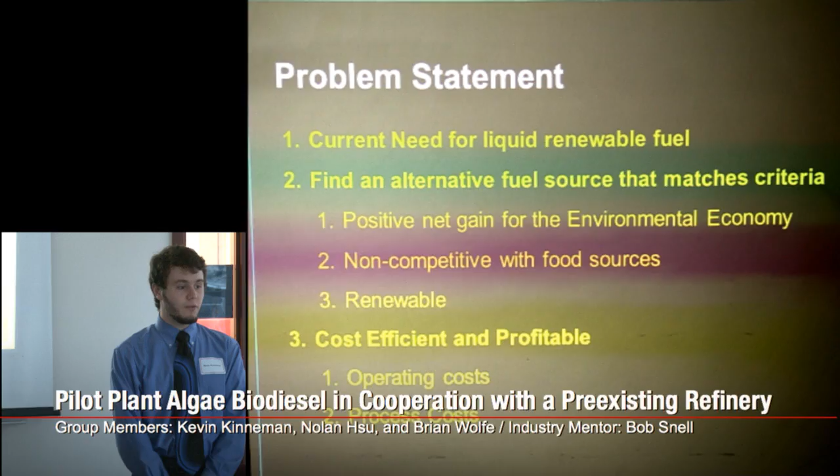We've noticed a couple problems in the industry these days, primarily that despite the rapid advancement of green fuels like solar panels and hydroelectric power, there is still a need for a transportable liquid fuel. Cars, jets, and boats still rely on this. It's difficult to put a solar panel in a car.

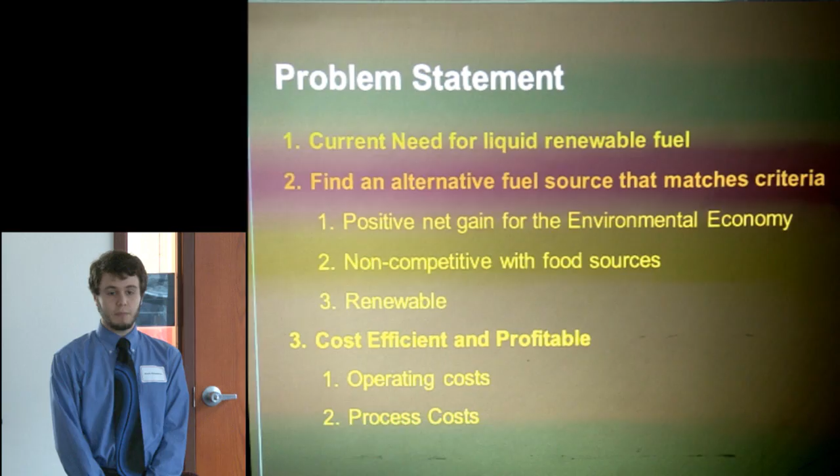So we're hoping to find an advanced form of biofuel which can act like diesel but doesn't have the issues of modern petroleum. It needs to have a positive impact on the environment, be renewable, not compete with foodstuffs, and if possible be as cheap and efficient as possible to produce, so there's a good profit margin to encourage development.

The current dilemma is that petroleum isn't the cleanest resource. Not only in its burn, but the production of petroleum is a CO2-positive process, releasing pollution to the environment. Additionally, there's currently not much else we can use for portable liquid fuel. There are limited options right now.

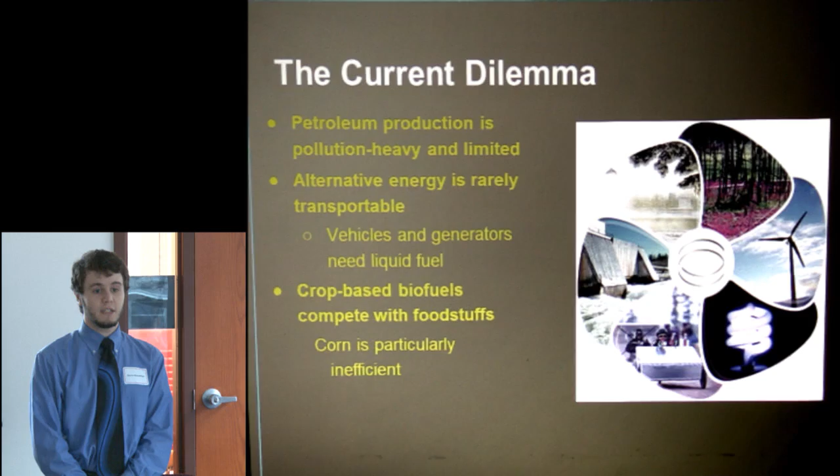However, biofuels from corn and sugarcane have come into the field, especially ethanols and gasolines. We're hoping we can find a method which doesn't compete with foodstuffs, because every crop dedicated to biofuel which isn't going into food is obviously causing trouble.

So our solution is algae, and we'll give you a quick overview of how it works. Our solution is to use an algae feedstock to produce a biofuel, specifically biodiesel in this case.

Algae is grown in a mix of phototrophic and heterotrophic processes, and in this it produces an oil. The oil can then be extracted from the algae cells, refined, and converted into biodiesel. This biodiesel can then be sent to a refinery, refined, and eventually sold to consumers.

The profit for a process like this can be improved by government subsidies, specifically renewable index numbers, which we will go into detail on later.

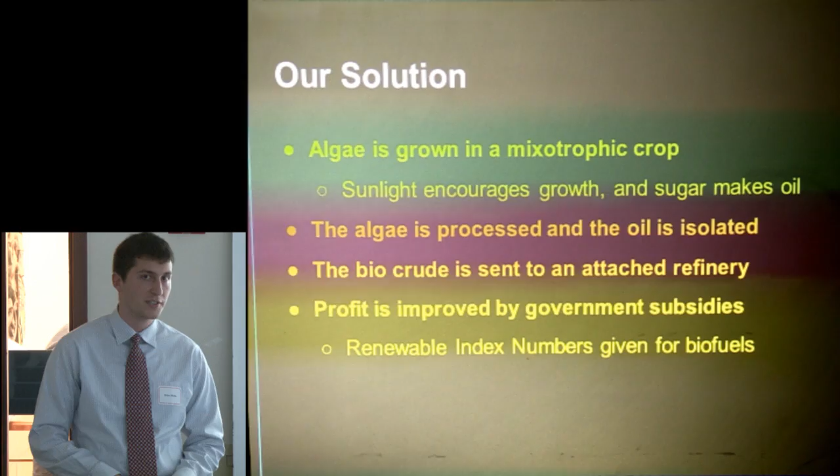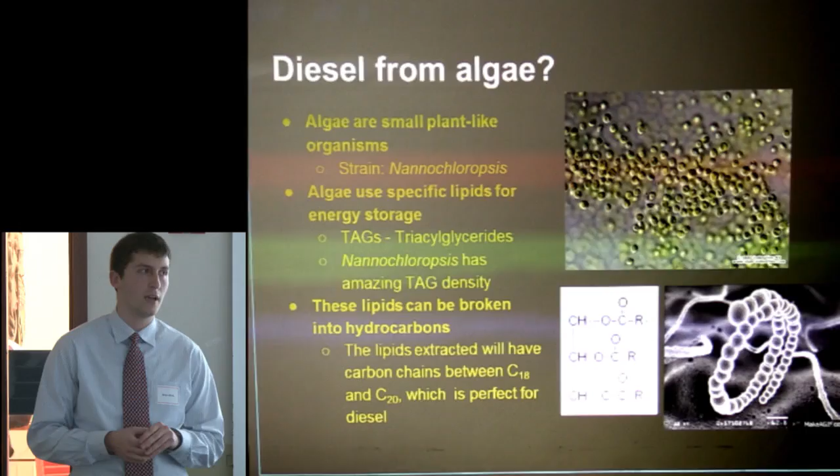So, how do we get diesel from algae? Again, algae are plants—basically small plant-like organisms which can produce an oil. For our specific species of algae, there are many kinds, obviously. We decided to go with Nannochloropsis as our specific strain.

The reason for this is a number of reasons. First, this strain of algae can be processed both heterotrophically and phototrophically, by a photosynthetic process or a metabolic process. In addition, this strain has a rather high lipid concentration per dry algae mass, which is ideal since the lipids are what gets converted into our final biodiesel product.

As far as the kind of lipids we're looking to get, algae store their energy in a form of lipid known as a TAG, or triacylglyceride. You can see a picture of what this molecule looks like.

Basically you have a glyceride molecule with 3 long-chain fatty acids attached to it. It's these long-chain fatty acids that comprise biodiesel, so when you convert it, you remove the glyceride molecule and you're left with your long-chain fatty acids.

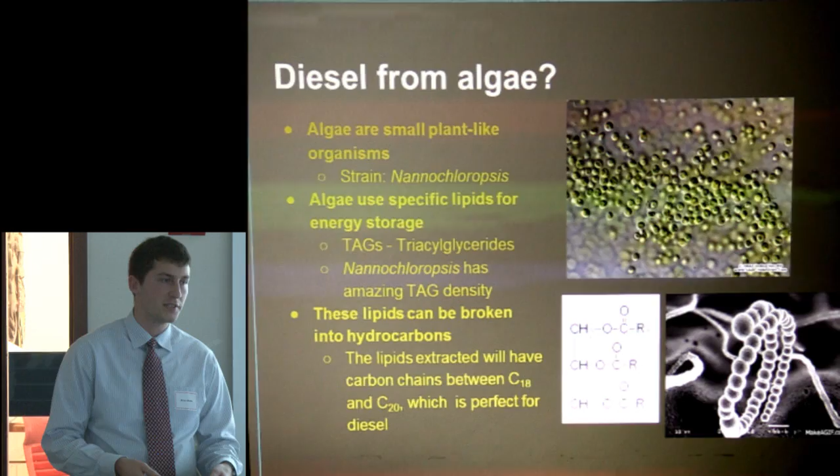The long-chain fatty acids are going to be between C18 and C20, because this is what matches a comparable cetane number for diesel fuel, and we want to mimic that.

This is a basic schematic of what our process looks like. There are 6 main process steps. We begin with algae growth in a phototrophic bioreactor, meaning it uses the photosynthesis reaction we all know from Bio 101: light, CO2, and water combined to grow the cell.

After this, we move on to a heterotrophic bioreactor, which uses a metabolic process—sugar and oxygen to grow the cells. The specific focus of this part is the lipid growth. After this, the algae must be dried. We have 2 processes for drying.

One is a bulk water removal by electroflocculation, and the next drying process is sort of a fine water removal using a continuous tray type dryer. The goal of this is to remove the water concentration down to less than 1%, and this is important because in the later extraction and conversion steps...

Having water in the system will lead to side reactions which we don't want, forming soaps and things like that. So after the algae is dried, we send it to an oil extraction step, which basically involves a hexane solvent to remove the oil. After that, the oil is sent to the final step, which is the conversion to biodiesel by a transesterification reaction, which is a common process used to convert any oil into biodiesel, including vegetable oils and things like that.

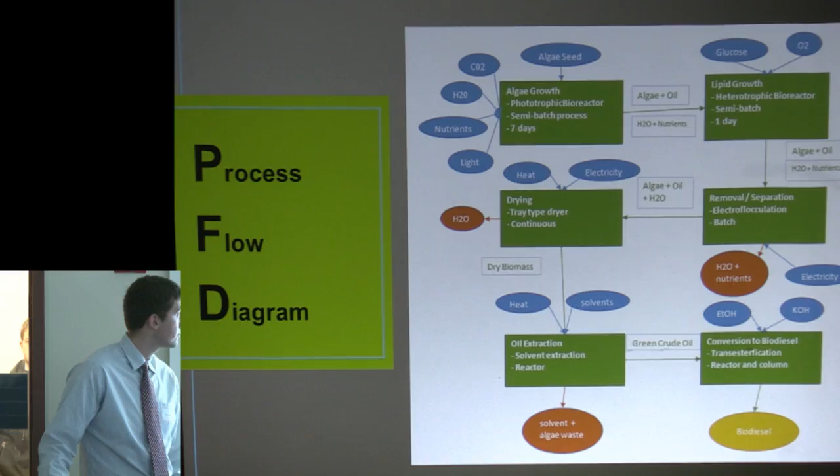So I'm here to talk to you about the business plan. The most important part: how are we going to make money?

Currently, algae-based technologies are inefficient. The heating process alone is extremely energy inefficient. Therefore, the cost to produce it does not outweigh the amount of money that can be made off of it. The way we're going to alleviate this is by combining with ExxonMobil at an oil refinery. With an oil refinery, we're provided with off-streams that they have, so heat, CO2, and water, as well as the expertise in land that Exxon can provide, while we're providing them with their own bio-renewable energy source, which cuts down their cost of production as well.

Our process currently produces 1,000 barrels per day. The reason we chose 1,000 barrels per day is that at 1 barrel per day, it's useless for the oil refinery. But at 1,000 barrels a day, we still maintain our pilot plant scale while giving a good amount of data to ExxonMobil. We hope to reduce costs by improving operational costs from ExxonMobil and then improve our sales of bio-renewable energy.

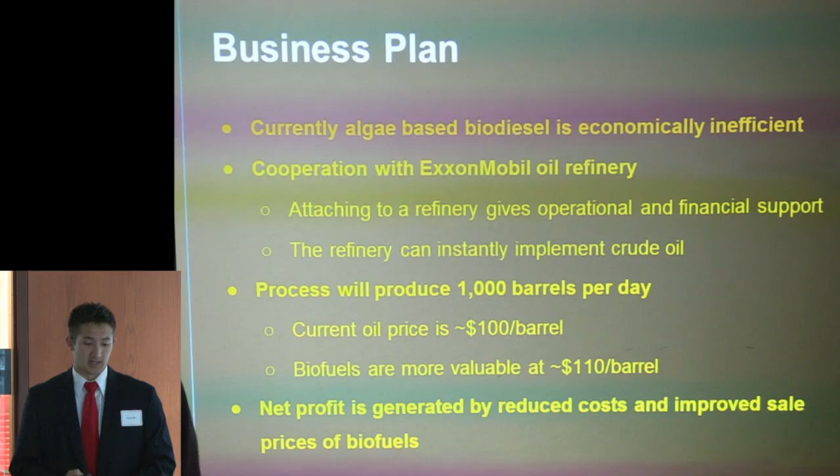So with that being said, welcome to Baytown, Texas. Baytown, Texas is where ExxonMobil Corporation's largest oil refinery is located. We've chosen Baytown, Texas for a couple of reasons. First of all, as we said, Exxon can provide that infrastructure and support that we need.

Secondly, Texas has a climate that stays the same throughout the year. We don't have to worry about any tornadoes or earthquakes too much, so we can easily create our equations to monitor all of our growth and our processes. In addition, the weather is consistent, so the sunlight for the algae will be consistent, and we'll be able to actually grow at a rate consistently throughout the year.

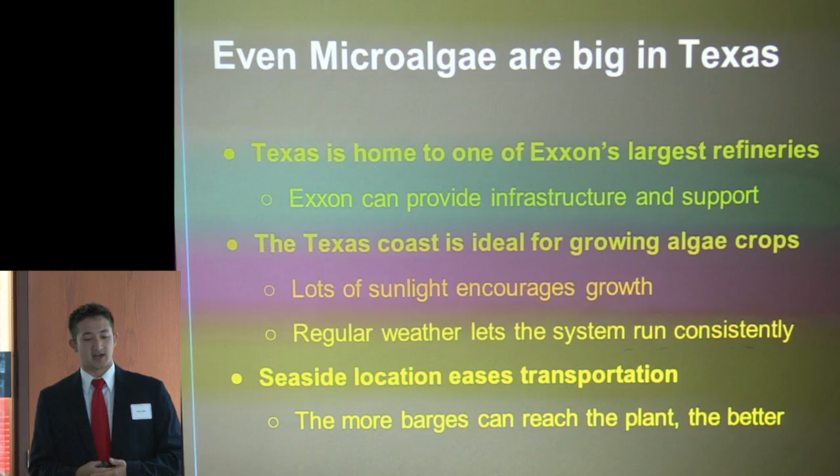In addition, if you look back here, we're on a port. That port will provide us transportation, which, as some of us know, is a large cost in the industry. If we're able to just take the transportation costs down, then once again, we remove operational costs.

So we'll go into a few specifics here for our business model. The actual growing process of algae requires three things: water, CO2, and nutrients. With the CO2 being one of the more expensive feed sources, it's imperative that we can use the oil refinery's CO2, as they have a ton coming off just from their process. This will cut down the operational costs of growth and give us a little more boost in production.

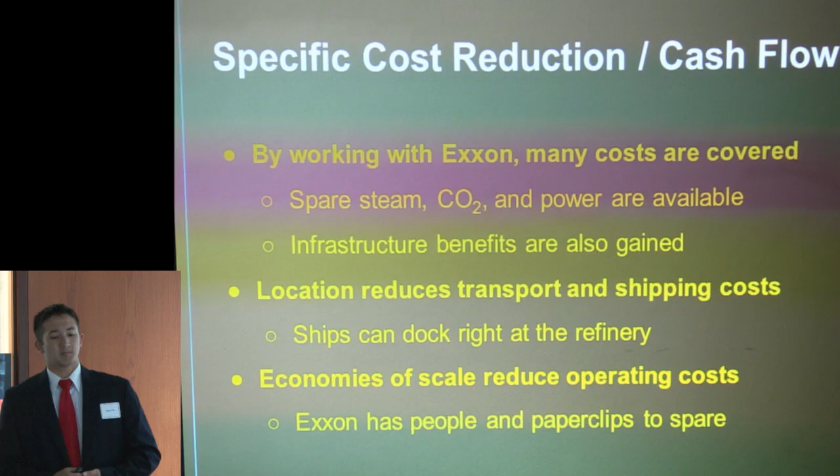In addition, the oil refinery produces a lot of heat, one of their off-streams, one of their byproducts. We can use that in our heating cycle to dry the algae, as Brian spoke about earlier, while not costing a fortune. And once again, we have the location of the ships and the docking, and Exxon has people, expertise, and experience to spare for us.

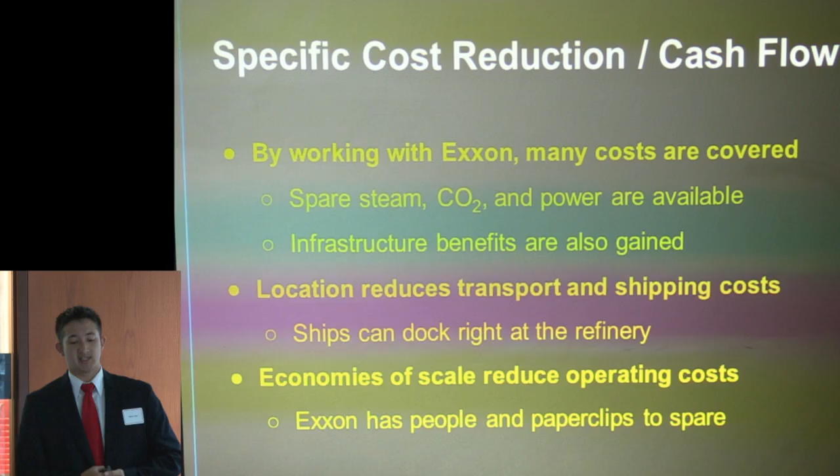At this point, we'll be starting with a quick technical summary of our process so you can understand the details of what goes on a little bit better.

Okay, so perhaps the largest portion of our process comes with the bioreactors. The point of the bioreactors is obviously to increase the cell count, grow the cells, but in addition to increase the lipid concentration, because it's the lipids that make up our product. The first phase of growth, of the two phases, is going to be the phototrophic algae growth, which is focused on the algae growth portion. How it works: it's a photosynthesis process, so light, CO2, water, and some other nutrients for the cells. The important thing here is that it's a carbon negative process, which is a rather important intrinsic benefit that we're looking for.

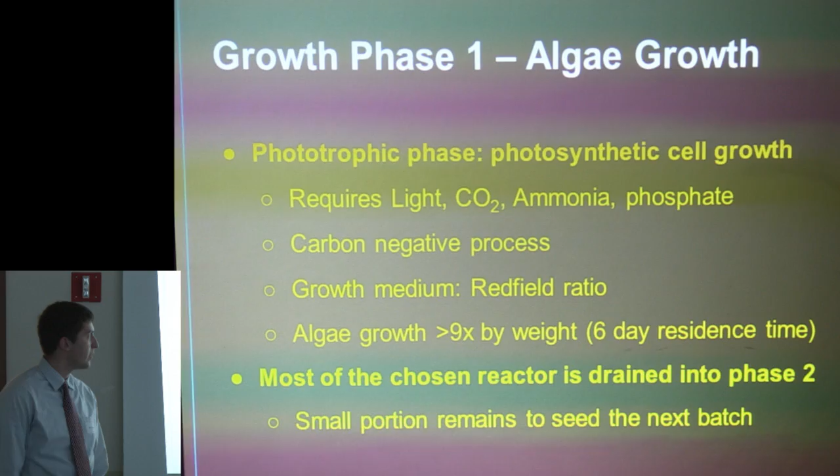As far as growth medium is concerned, we've been following a Redfield ratio for our calculations, which is basically an empirically derived ratio of carbon, nitrogen, phosphorus that can promote optimal algae growth. At the end of the day, we expect over a residence time of 6 days to get algae growth in the reactor of over 9 times by weight.

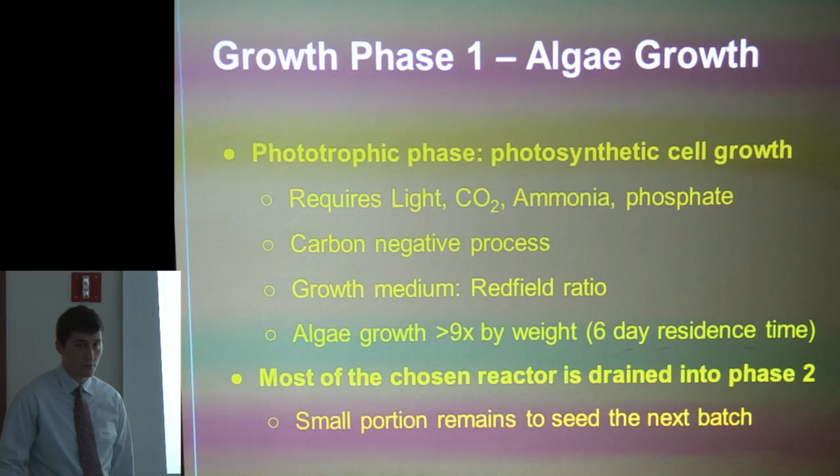After this point, the algae are then transferred to the heterotrophic growth phase, with a small portion being left in the reactors to seed the next batch of photoreactors.

So the next part of the growth is going to be a heterotrophic process, which is a metabolic process. Instead of light and CO2, you use sugar as your carbon source and oxygen to promote growth. The key here is that the heterotrophic process is focused on increasing lipid concentration, and it does this by removing the ammonia.

It's been shown that if you starve the cells of nitrogen, you inhibit their growth, at which point they take the energy and convert it into lipids instead, because they can't grow anymore. So that's what we're doing here.

Our outlet concentration that we're looking to get is 150 grams per liter. That's pretty standard, found in the literature, and we can do this over a residence time of 1 day. So these are just some visuals so you guys can see what we're talking about here.

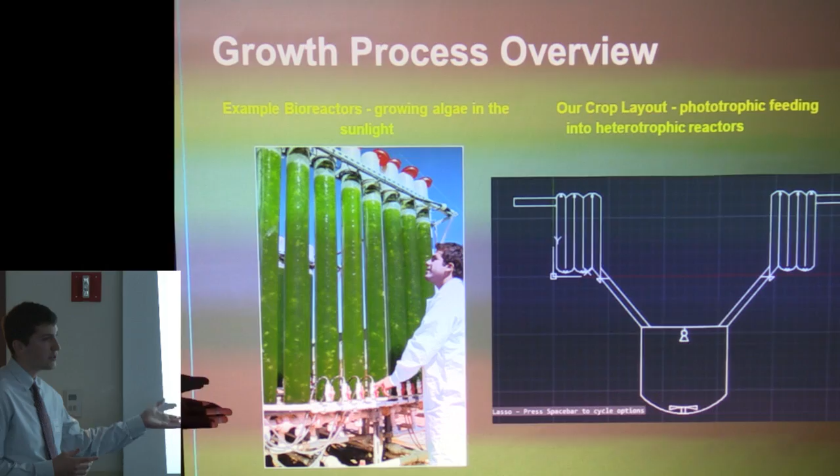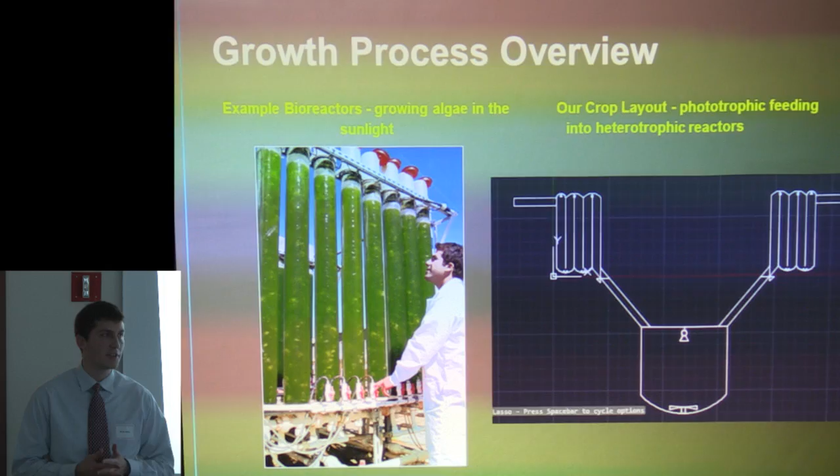Here you can see a picture of a phototrophic bioreactor. Obviously, they're usually made out of glass to allow light to penetrate through, and they often have the cylindrical shape really to maintain a high surface area to volume ratio, so that you can get a lot of light to penetrate through there. You usually don't see reactors any larger than 20 to 30 centimeters in diameter.

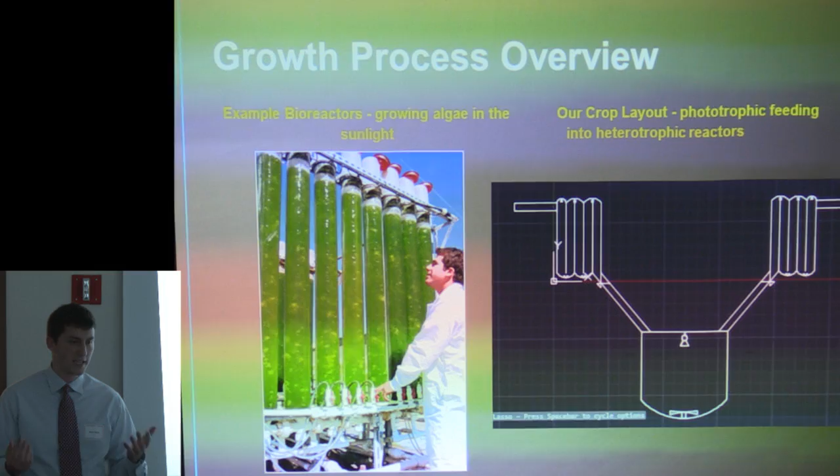So then, after the phototrophic part, they head over to the heterotrophic part, and here we see a small schematic of phototrophic leading into the heterotrophic reactors. The heterotrophic reactors are simply just steel tank batch reactors. They can be large. Surface area to volume doesn't really matter.

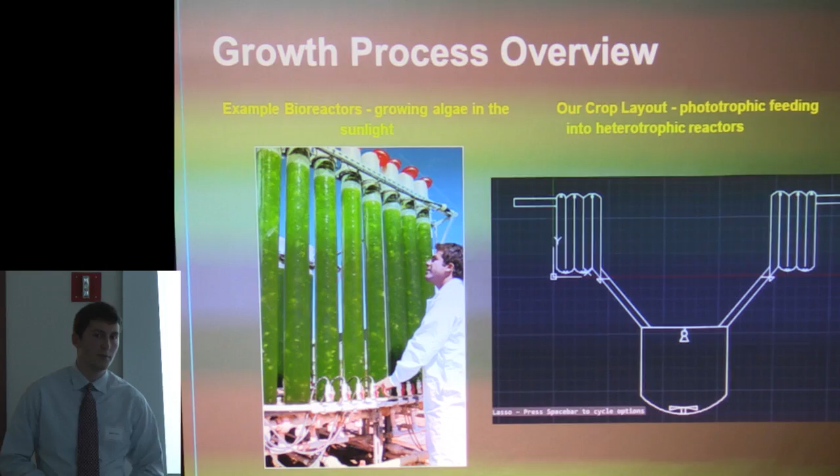And just to give you guys an idea of the scale we're talking about here, in order to achieve 150 grams per liter concentration at the outlet over our 7-day period, we calculated that the reactor volume is going to need to be on the order of 28,000 cubic meters, which is kind of a lot.

Based on the literature and stacking and organizing the batch reactors, we find that it will take up an area of about 70 acres, which sounds like a lot of space, but compared to alternative methods using vegetable oil, corn, things like this, it's almost a full order of magnitude more efficient per acre, the biodiesel that we're getting out of it.

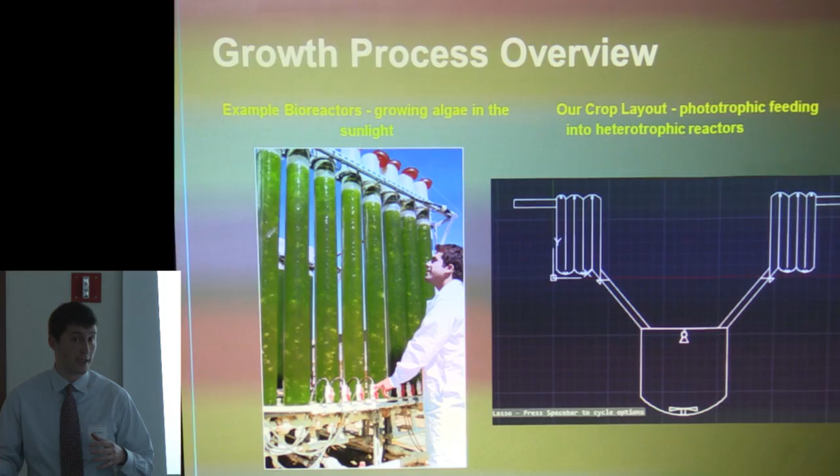So the next step that we've determined is the drying process. And the drying process will be done in 2 phases, the bulk water phase and the fine water phase.

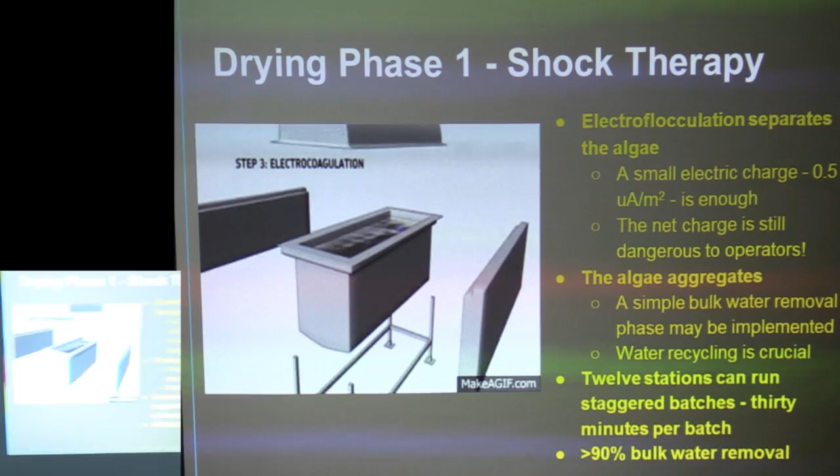So for the bulk water phase, we messed around with a few ideas. Centrifugation and filtration came up. Unfortunately, Nannochloropsis is a very small molecule for algae, it's on the nano scale. So for filtration, there's no filter that can take our mass coming out per day while being durable enough. And centrifugation would be a huge capital cost to invest in, and if that breaks, our system has to shut down.

So what we've chosen is an electroflocculation process, also known as electrocoagulation. It's a rather simple process. A small charge density is applied to a batch process, which causes the algae to aggregate together. Once it's aggregated together, the water can either be siphoned off, or you can scrape off the top of the algae if it's risen to the top in a slurry.

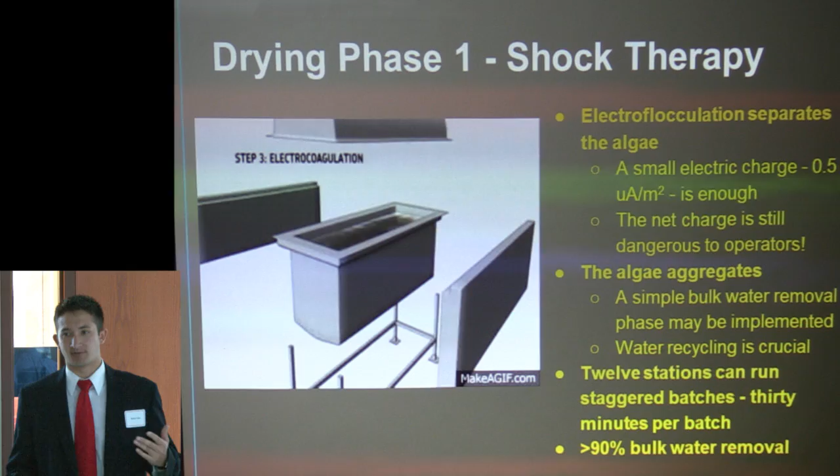Now, this net charge can be dangerous, so our process will be grounded after it's performed. However, it's a bulk water process that removes about 90% of the water, and we've determined that it will take about 12 batches to perform per day. If we do this staggered, 30 minutes per batch, 15 for the electroflocculation, 15 for the removal, we can run this in about 6.5 hours of operating time.

The next station we go to is the continuous tray dryer. At this point, we have to do fine drying, removing that remaining 10% left in the algae. We've determined that we don't want to do this in a batch process because that would be inefficient, doing process after process per day, and will be time consuming.

So what we've chosen here, as Kevin likes to refer to it, is baking our greens. The baked greens process is the continuous tray dryer, and as you can see here, it's kind of like baking a pizza. You've got a bunch of conveyor belts moving along for the algae that's put in continuously, and heat will be applied. This heat is from the oil refinery, from their off streams, which will cut our oil refinery costs from the 820,000 kilowatt hours per day that we may have to incur as an expense to about 0.

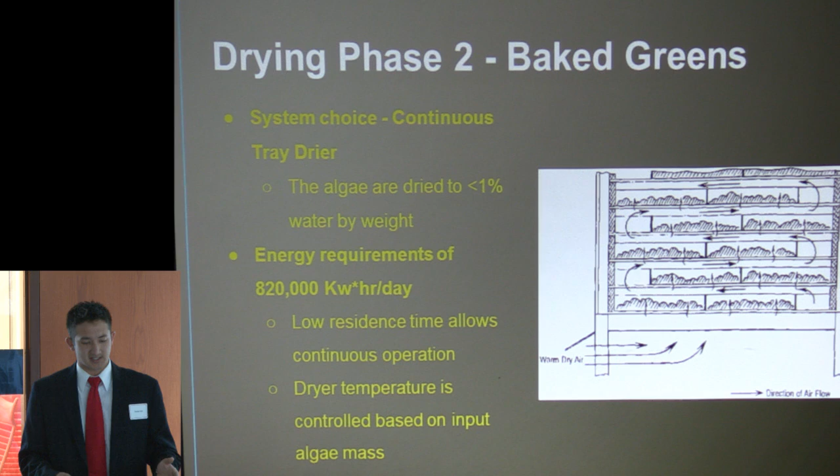This also provides a low residence time and is very effective in drying our algae. We'll go into a few controls later on, but basically this process removes up to about 1% left of the water. Thank you for that color commentary, Noah.

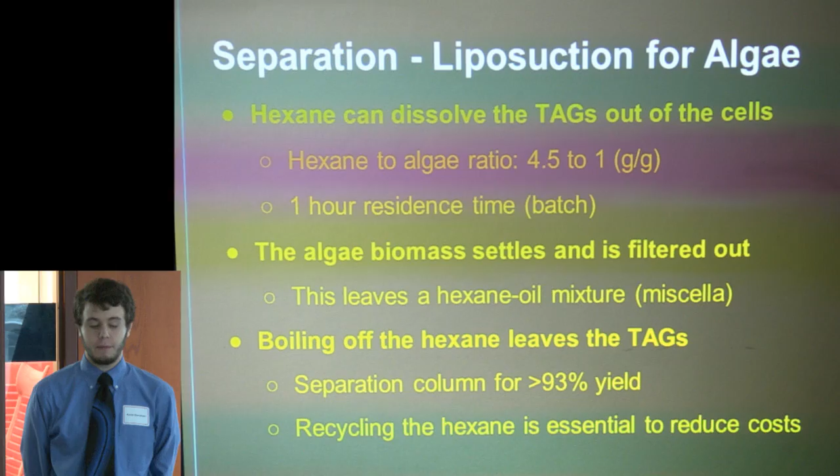You're welcome. Once we have dried the algae properly, we then need to actually get our hands on lipids. That's why we grew the algae in the first place. The easiest way to get the triacylglycerides out of algae cells is through dissolution in hexane. Hexane, due to its chemical properties, at about a 4.5 to 1 ratio with the algae by mass, will cause the lipids inside the cells to dissolve and become part of the hexane solution, but leave the algae husks behind. That's called a miscella.

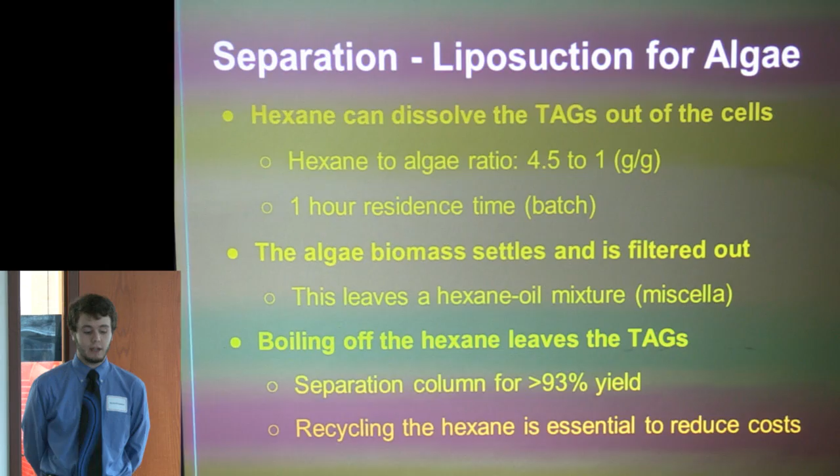Once the algae biomass settles due to its comparative density, we can just drain out the hexane solution and boil it off relatively easily in a distillation column. This will give us a 93% yield of our lipids by mass from our algae, which is quite excellent compared to what we've seen in the literature. By recycling the hexane, we can keep our hexane prices comparatively low.

Once we've got our hands on the lipids themselves, we then convert it directly to biodiesel. This is through a process called transesterification. This is the industry standard method, very well documented in research, so we don't have to worry about it being too novel or requiring overly creative solutions. Basically, by immersing the lipids in an excess of alcohol, at about a 4 to 1 ratio of ethanol to oil by mass, we're able to break off the fatty acid chains from the glycerol head and get our hands on raw hydrocarbon.

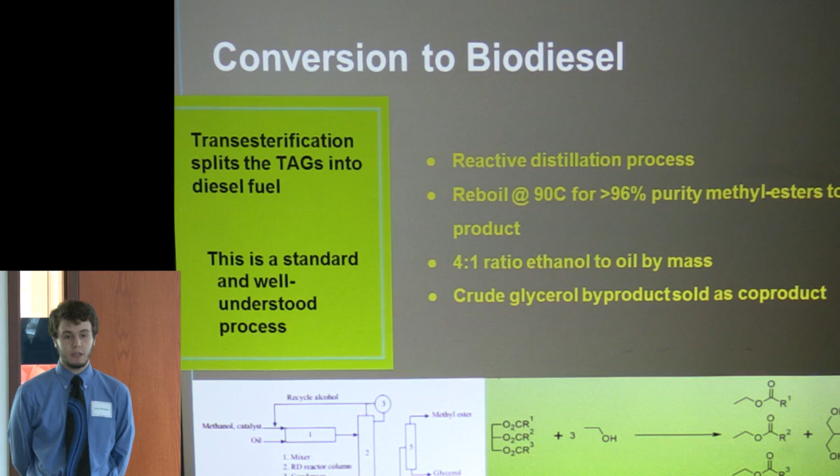The hydrocarbons are a primary product, of course. The glycerol heads and the husks can then be sold as a co-product, and through this process, we can get about 96% purity in our biodiesel. This is, again, quite good compared to what we're looking for.

There are, of course, some safety considerations to take in mind, which we have covered in a limited degree earlier in the presentation. First of all, the electroflocculation chamber involves placing an electric charge through water, which is very dangerous to our operators. Thus, we're going to design it in such a way that it's very hard to do anything bad to our operators, and we're going to try to automate the system to the degree that we can so that operator involvement is minimal, especially manual involvement.

The same goes for our drying chamber, which is effectively a very large oven, and we don't want people inside our oven while it is on. Emergency cooling systems will also be included so that in case there is something terribly unfortunate in our plant, we're able to respond immediately.

The largest issue we faced was hexane in our separations process. Hexane is both acutely toxic and explosive, so we need to make sure that our process is very well sealed and maintained at cold temperatures so that the hexane is never at a location or in a concentration in the air that's hazardous. We've actually taken some looks into alternative solutions as well, which we'll describe later in the presentation.

One special safety consideration is actually keeping the algae safe. We need the algae to be relatively pure in our streams because if it's not, there could be all sorts of problems with side reactions and purity levels. As such, we keep our phototrophic and heterotrophic growth systems as closed as possible, and we make sure that our operators don't get involved with the algae as much as possible because operators are contaminated as well.

And one big thing is that we regularly clean our system with a caustic solution. This is absolutely essential because if the algae is allowed to get contaminated, that's bad. But what's even worse is if a mutation is allowed to develop.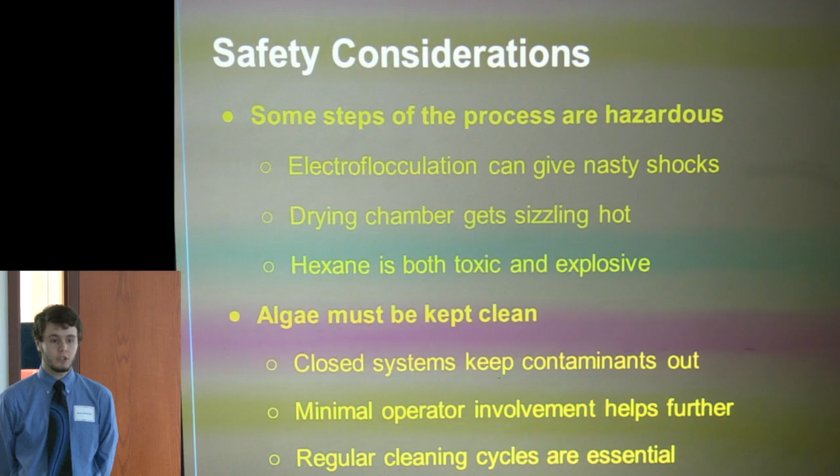If we get a mutated strain, we not only lose that batch of algae, but we will lose every batch of algae derived from it after the draining process. So we need to make sure that genetically our algae remains safe.

We've got some analysis of how we could scale this up. For the most part, our system can be made larger, but our algae crops have to be mostly multiplied. It's difficult to simply make larger tubes because those reduce the surface area to volume ratio. But based on the literature, we can expect to scale this up to as many as 700 or 1,000 acres to make it commercially viable.

Some systems could also be expanded or made slightly redundant. If we wanted the continuous tray dryer to be larger, that'd be easy, but if there's enough money free, it might even be possible to have two of them so that in case one fails or needs to be shut off, the process can continue indefinitely.

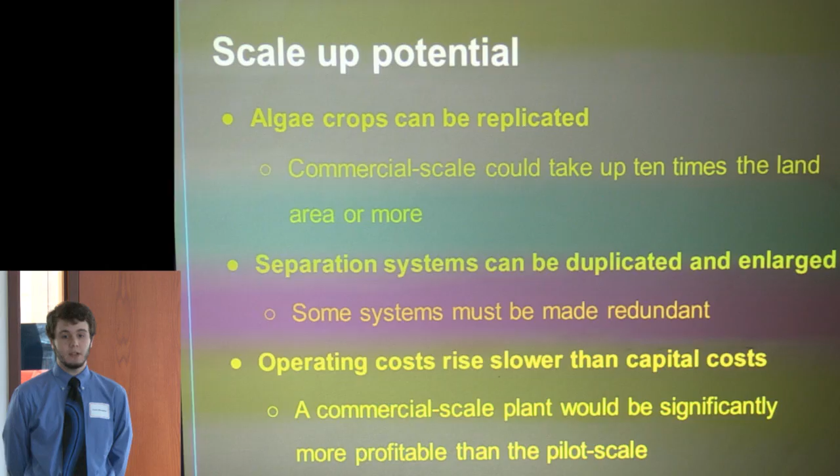This also makes us more profitable at commercial scale, because many of the functions and processes in our plant have high capital costs, but the operating costs are fairly stable, especially operators. Individual operators can manage fairly large systems and fairly small systems at about the same efficiency, so long as we're careful about how they're managed. We believe a commercial scale system can be done quite easily so long as the money is available. At this point, we'll begin talking about controls and testing.

As Kevin said, I'll be talking about controls and testing here. One of the challenges we were presented with was continuing our process continuously. We want to reduce the amount of operator or manual labor needed, so we put in some controls and parameters that will need to be controlled automatically.

First, the bioreactor's nutrient feed flow rates. We can monitor the amount of lipid growth and the amount of growth in the algae, which will allow us to change the nutrient feed flow rates daily to get our desired algae outcome.

Secondly, the drying process. While the electroflocculation may need to be monitored a little, we found that the charge doesn't actually vary that much. You can put a smaller or larger charge, and the most important thing is to keep it safe, so we won't be monitoring that much. What will be monitored is the heat generation in the continuous tray dryer, and I'll go into that a bit in the next slide.

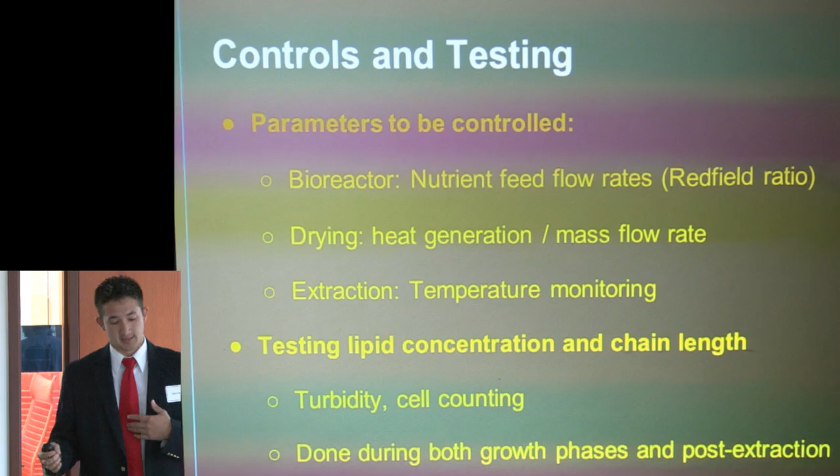Secondly, the extraction process with the hexane. We don't want the hexane to overheat and cause an explosion or injury to our operator, so we'll be monitoring the heat in those batch reactors.

As for testing, we'll be testing the lipid concentration and chain length to ensure productivity and that our product is actually what we say it will be. We don't want to promise a product we can't deliver on. We'll also be testing turbidity, both during the growth phase and post-extraction.

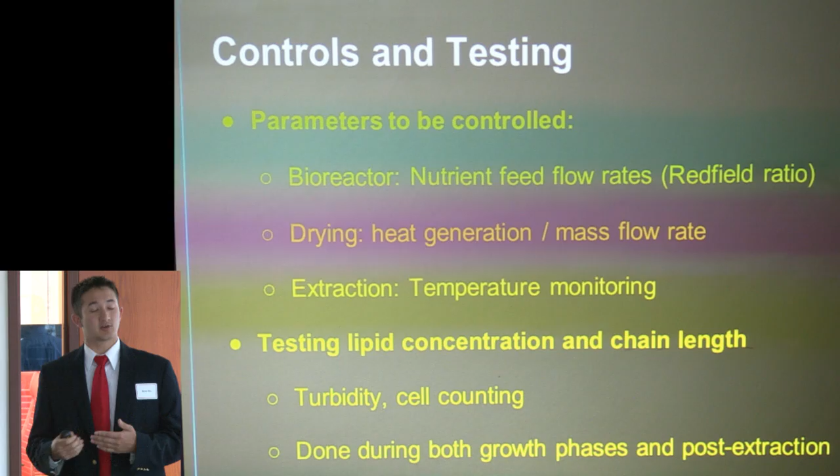We've determined there won't be gains from other parts of the system, mostly because this is an off stream from the oil refinery. When we analyzed the process controller, the PID, we determined that a proportional controller would actually be most beneficial. The integral and derivative terms came out to about 0.0042, which would be really inefficient, and the capital cost wouldn't be worth the control we'd gain. So we've chosen a proportional controller.

As for the valve that controls the heat, it will fail to close. This is already a waste stream for the oil refinery; we're just taking an off stream. The worst thing that can happen is too much heat coming into our system, overheating what we have going on, so it will fail to close, sending flow back to the waste stream.

This will be a feedback controller measuring the water content in the system, as opposed to a feed forward or cascade controller. It is possible to make this feed forward or cascade, but that requires a math model that we simply don't have the math or data to create.

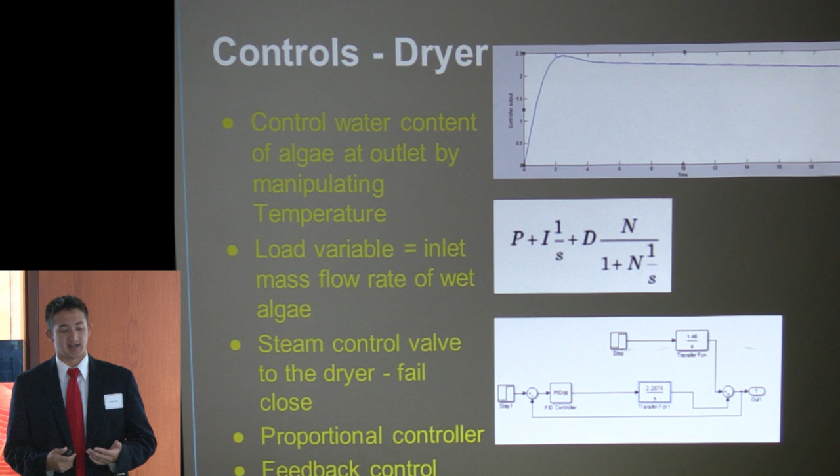Just moving on to a quick economic summary.

Before we dive too much into the numbers, I want to talk about a brief topic known as RINs, or Renewable Identification Numbers. This is important to us because it's related to the legislation and government subsidies regarding biofuels.

RINs are basically the EPA's method of controlling and enforcing biofuel legislation in the United States. The RFS, the Renewable Fuel Standard, requires that every year companies mix a certain percentage of their fuel with biofuels, and RINs are how the EPA tracks and checks that everyone is producing the amount of biofuel they need to produce.

So how it works is that every gallon of biofuel has a RIN associated with it, and at the end of the year those have to be turned in to match the quota of the company.

Now, how RINs are structured is kind of funky. They can actually be traded and sold between companies, so if you're stockpiling a bunch of RINs, you can sell those to other companies. Because of that, the RIN is basically a commodity item now that has a price associated with it.

We can actually utilize this because we'll be generating excess RINs, since we're a green technology we can generate 1.5 RINs per gallon of fuel, so we can make a profit from these excess RINs to help with profitability.

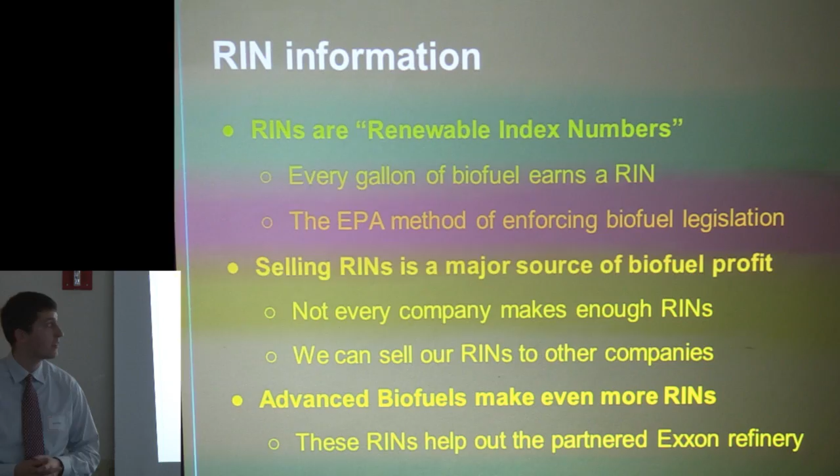For fixed capital cost estimation, we used an order of magnitude analysis, which is basically plus or minus 40% on this. There were two methods.

First, we compared our capacity to existing biofuel pilot scale facilities. We took their capacity and their fixed capital cost and used that compared to our capacity to extrapolate a fixed capital cost from that.

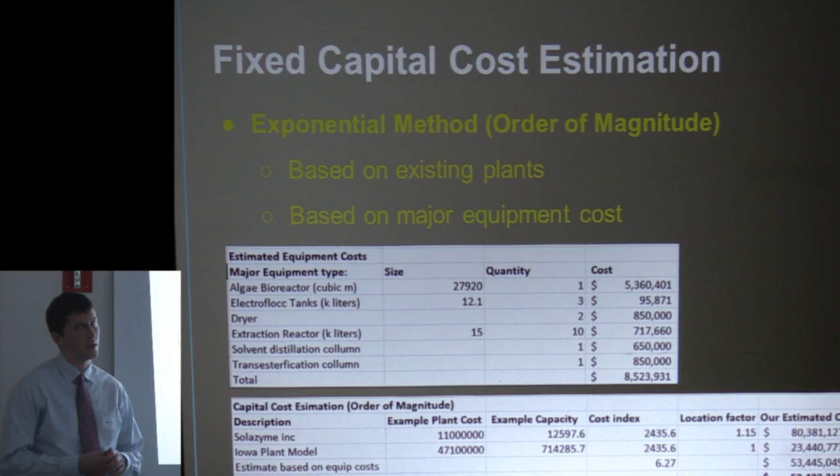Based on Guthrie method factors found in there, you can extrapolate the total fixed capital cost from that. So we came up with, I think it was $52 million for our fixed capital cost.

The total variable cost we came up with is $76 million. This is a worst case scenario where the refinery says, okay, you guys are on your own, we can't really support you, so we would be paying for all of our CO2, all of the utilities, and we wouldn't get any spare heat from them.

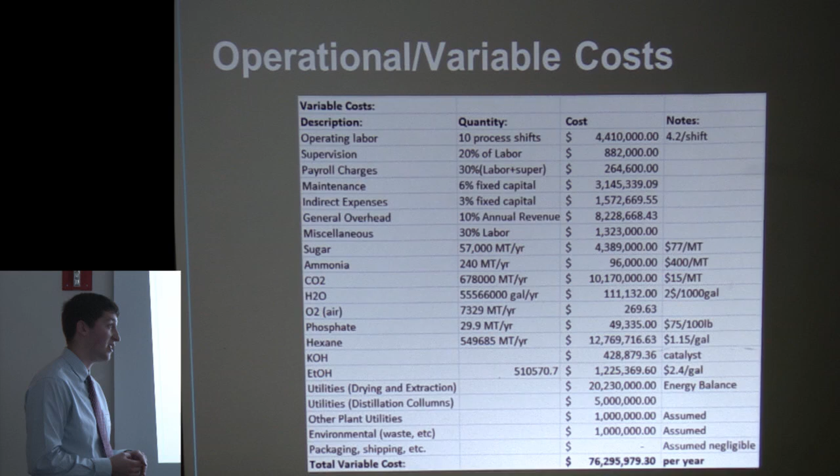If you look at the utilities, the drying is $20 million, which is kind of a lot, and CO2 is $10 million a year. So if we can get support from the refinery on those, it can drop our variable cost.

Now, as far as the cash flow is concerned, we have four main sources of revenue: the biodiesel, the RINs associated with the biodiesel, the glycerol coming out as a bottoms product from our transesterification reaction, and finally the dried spent algae husks from the extraction.

Our total revenue we came up with was $82 million. Based on straight line depreciation, 15-year useful life, taxes, all that, we come up with a gross profit of $4 million, payback of 13 years, and about a 2% IRR, internal rate of return, which sounds good because we're making money.

That's always good, but unfortunately, since the working cost of capital in the industry is between 6 to 8%, that's really not all that good. We're not really up to par.

This first figure is based on a worst case scenario where we are basically our own separate plant, not getting any support from the refinery.

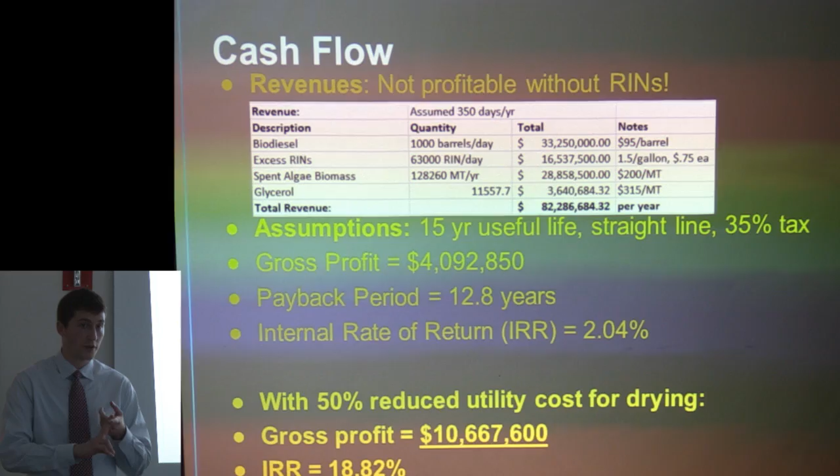Now, if we consider that we can utilize waste heat streams from their high temperature processes, since our drying processes are relatively low temperature in comparison, it's not unreasonable to assume we can get about a 50% reduction in utility cost for the drying. If we assume this, our gross profit jumps up to $10.7 million, and our IRR is 19%. So basically, if you get nothing else from this slide, understand that without the combination of RINs and support from a refinery, this isn't profitable.

So now, turning back to the scale-up ideas, once we've got all this profit in mind, there's always the fact that if it's profitable, it might be more profitable at commercial scale.

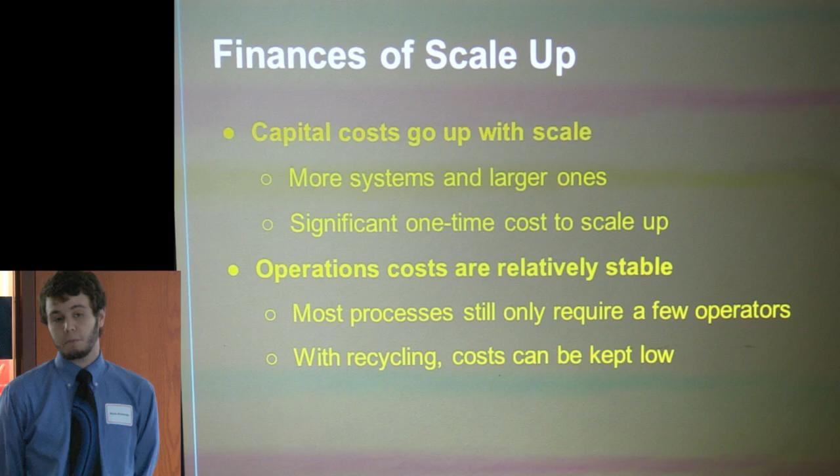As we mentioned earlier, for the most part, it's the capital costs which go up with scale. You have to build more machines and build them larger. However, there's a comparatively small operational cost increase, since for the most part resources can be reused and recycled, and there's not a tremendous increase in paying operators, because you have the same number of them managing larger but not necessarily more complicated machines.

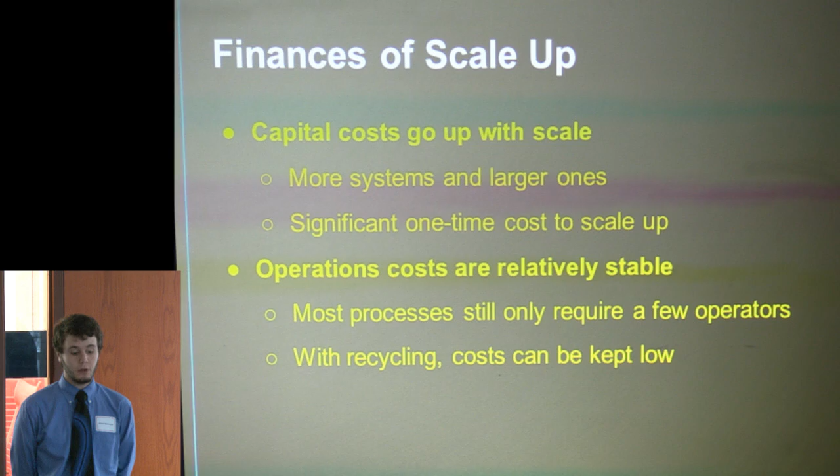For this reason, we believe a commercial scale up could be possible and highly profitable if we went up in production by about 10 times, to 10,000 barrels per day.

We also have a couple of alternative considerations, such as technologies and future economic incentives. We didn't immediately come up with this particular combination of technologies for our system; we had a few other ideas. A mixotrophic growth process, in which the sugar feed happens at the same time as the light feed, was considered. It's generally considered more efficient, but right now it's very difficult to balance with commercial scale algae production, and we couldn't find any literature suggesting it was easily done or managed.

We could also, instead of using hexane to separate our oils, use membrane separation or heptane, which is significantly safer. There are a few issues with each of these, which is why we went with hexane, mostly because it gets the highest yields. Heptane works faster and is safer, but its yields are disappointing compared to hexane, so it would need a more advanced system to get the same output.

Similarly, in order to keep our price advantage, especially once we go commercial scale, we need a few different ideas. One is that we could patent our design and license it to other companies, so our plant would be repeated multiple times across the country and the world. This helps make sure we remain profitable.

Other options include making sure that going commercial scale could potentially drastically increase our profitability, helping keep us economically viable even as the system advances.

Finally, the biggest thing that would help us a lot is qualifying as an advanced biofuel. There are a number of legislation issues with this right now, but if it does come through, that will increase the number of RINs we get per gallon, again increasing revenues and profits.

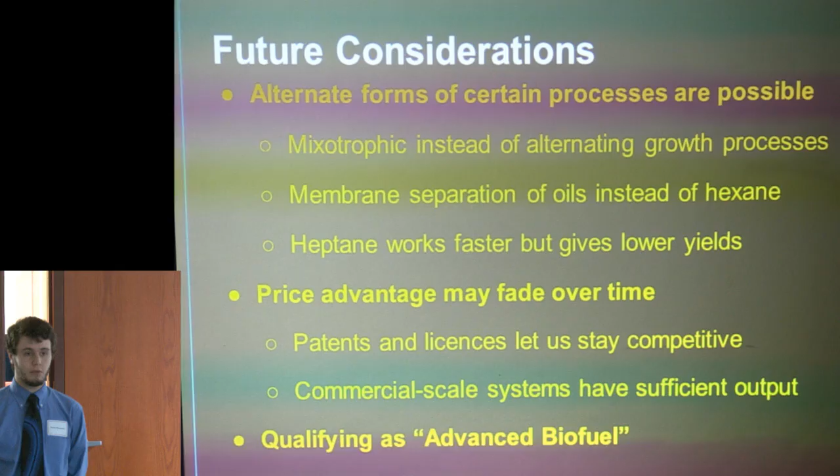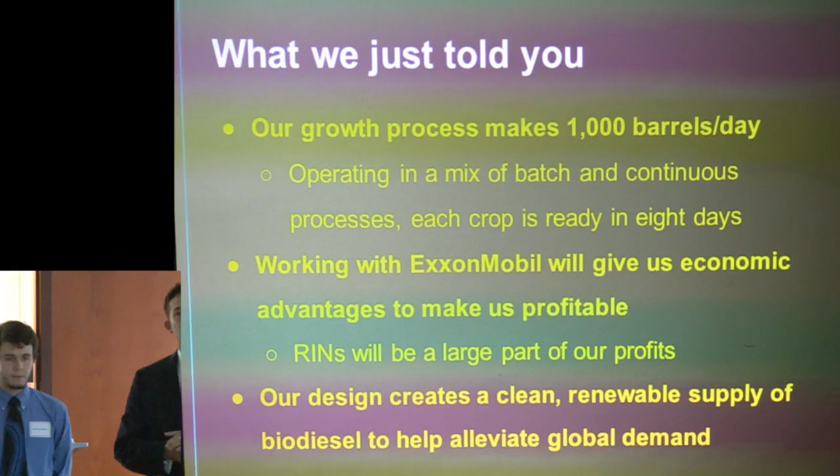Just some final thoughts. We did throw a lot of information at you, and I know it's hard to absorb it all at once. So what we're going to do is take a currently non-profitable technology in bioalgae, combine it with an oil refinery, and produce at 1,000 barrels per day to become profitable by reducing operating costs and having that partnership.

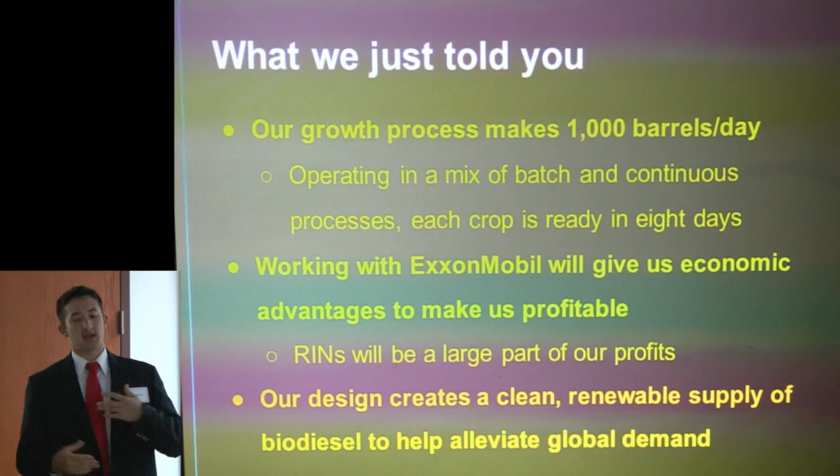We will utilize the partnership in combination with United States regulation in the form of RINs to help make this profitable.

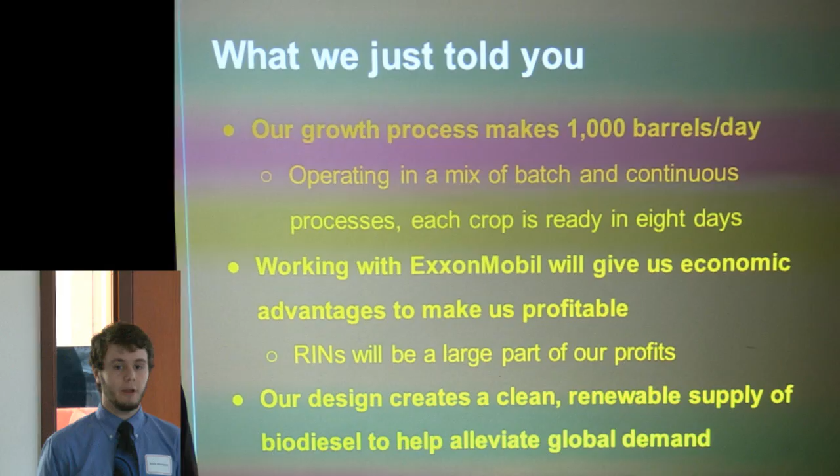And lastly, if everything goes well, our design will give us a clean, renewable source of biodiesel which can help alleviate global demand for a transportable liquid fuel. Does anyone have any questions?

And I don't know why I was doing that all the time. Wasn't so bad. So, in all seriousness, does anyone have any questions?

No questions is great too. Yes, Professor? Easy one. What's the price fluctuation for the RIN?

We actually have a chart of that. So the price fluctuation, let me give a little background. The EPA's pricing is usually consistent with spikes near year's close, as people scramble to grab the amounts of RINs they haven't made throughout the year. That's when the price actually fluctuates up.

However, there have been issues with the EPA. They determined there's less demand, only 2 billion gallons worth of biodiesel for algae. So currently the price is at $0.75 per RIN. We expect that to fluctuate higher in the oncoming years, but that's our current figure for the past year and a half or so.

Just to give you an idea, I believe in January or December it was up well over $1, at like $1.40 or something. So it fluctuates pretty drastically.

What was the temperature of your dryer, and would you ever consider air drying your product to save utility costs if you didn't have the streams from another plant?